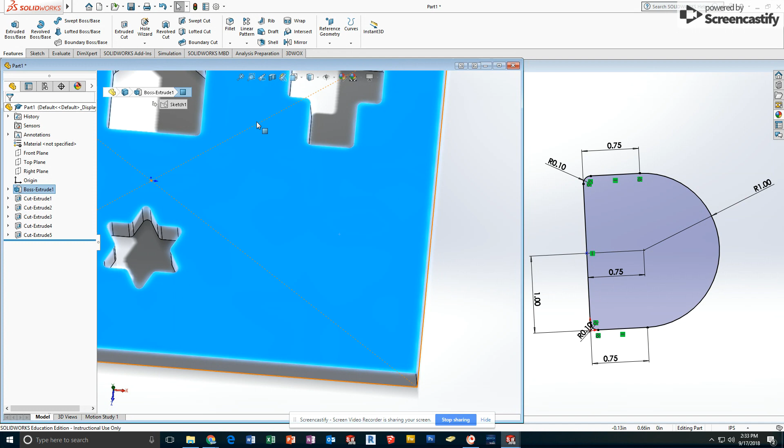To make the hole for the D-shaped block, I'm going to use the last remaining section in my little pattern here. I'm going to open a sketch here. Now, this one is a little more complicated than it looks. There's probably 5 or 6 ways to do it, but I drew this originally by overlapping 2 shapes. That's the way I'm going to show you.

So I'm going to start out with a circle. Not worried about its size yet. I'm then going to start out with a center rectangle. I'm going to come near the center of the circle and pull horizontally so that the center of my circle and the center of my rectangle line up. I'm also going to try to match about the same size, but we can always add things in a few minutes.

Using my dimensions, I'm going to start out with dimensioning the circle as a 2-inch diameter. I'm also going to dimension this length as a 2-inch length. I am going to make this the 0.75.

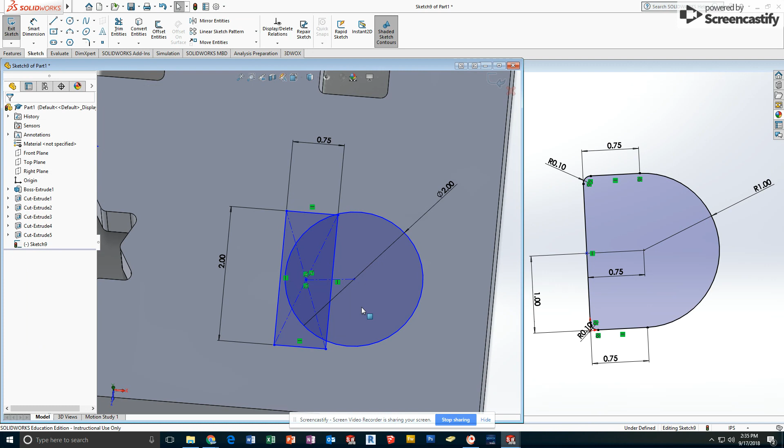I also am going to use a center line drawing from the center rectangle to the center point of the circle. You'll notice in my case that line is not horizontal because as I shifted this dimension, it shifted down. It did not keep that relationship that I needed. So I draw that center line. Then when I click on the center line, I can make it horizontal. That will force those two to line up.

The next thing I'm going to do is I'm going to take my dimension, and as I have right here, I'm going to go from the center of the circle to this edge right here, and that was supposed to be 0.75. Now you can see things are starting to connect. I have a lot of extra lines though, so I'm going to get rid of the extra lines before I worry about fine-tuning this so that it's fully defined.

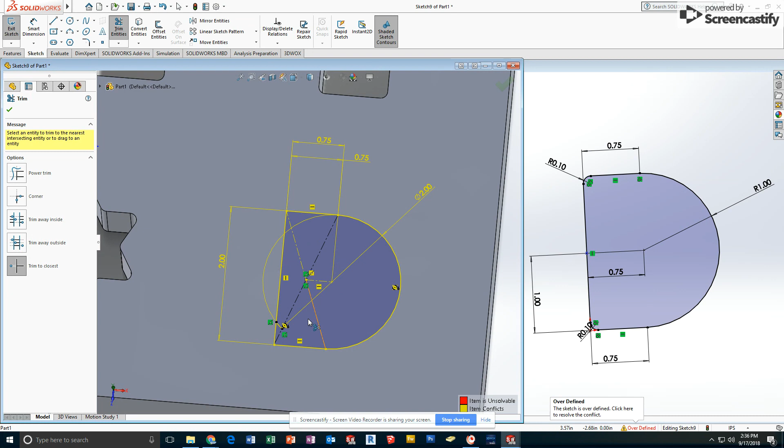I'm going to get trim entities, trim to closest. I don't need this. You'll notice some of my stuff went away, and we'll work with that as we get to the end here. I'm pretty sure I know what the problem is. It should be this dimension right there, and in fact it is. The problem is we used a diameter dimension. That, as soon as it's no longer a circle, is a radius.

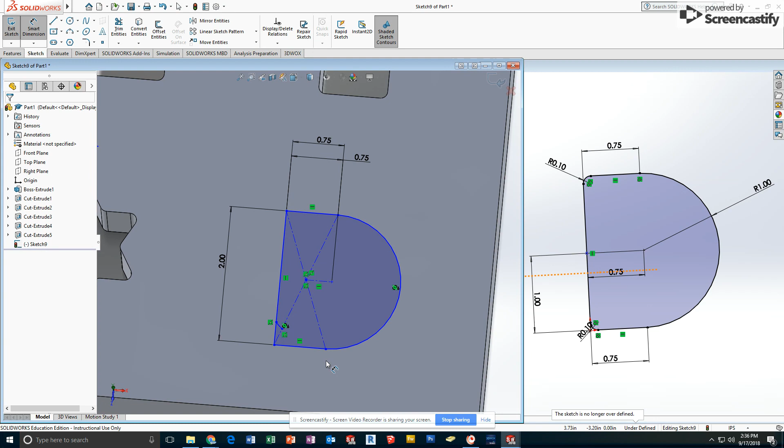Oh, I'm sorry, it looks like I don't need that dimension. Oh, I did miss a trim right there. Don't forget the little parts too. So we're going to go ahead and smart dimension this, because the dimensions it must be wanting must be their location. So we'll put it at the 1.25. And from 1.25,

and from this to the edge, I'm going to dimension as 2.25 because I have a 1-inch radius arc here. So from this midpoint to the edge is the 1.25 that'll match the other shapes. At this point, I am fully defined. And I will now go ahead and sketch fillet my 2 corners.

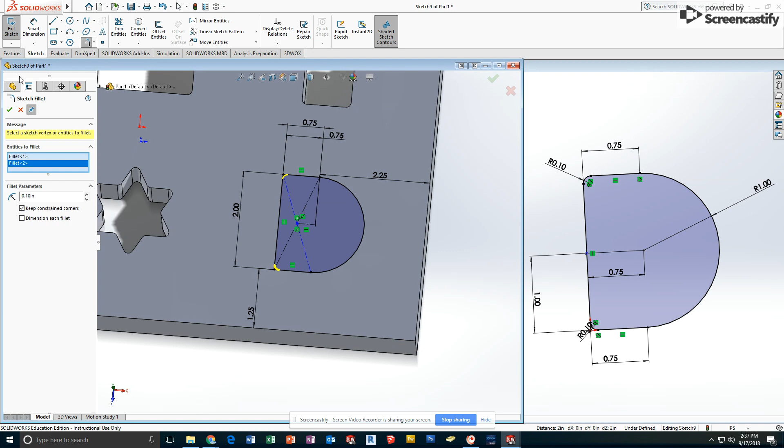Once that has been done, I'm going to exit the sketch, extrude cut through all, creating the hole that would accept the D-shaped block.